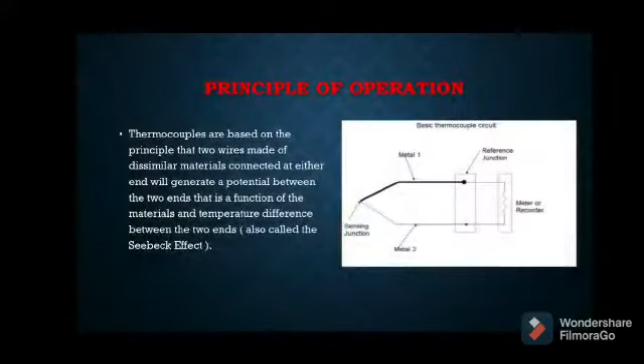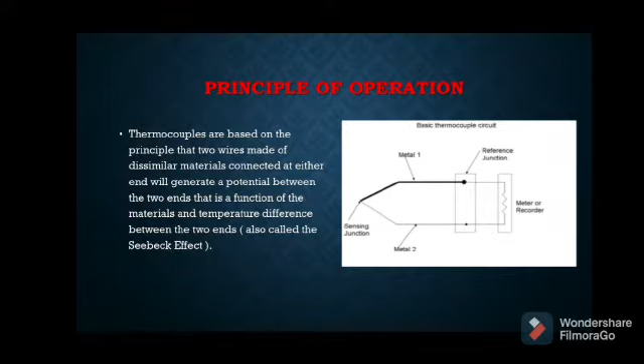Principle of operation: thermocouples are based on the principle that wires made of dissimilar materials connected at either end will generate a potential between the two ends that is a function of the material and temperature difference between the two ends, also called the Seebeck effect.

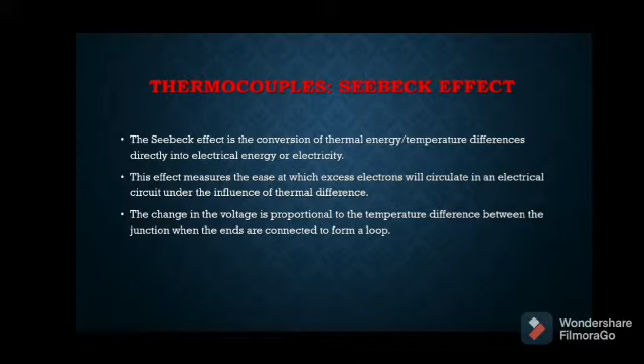Seebeck effect: the Seebeck effect is the conversion of thermal energy or temperature difference directly to electrical energy or electricity. The effect measures the ease at which the excess electrons will circulate in an electrical circuit under the influence of thermal difference. The change in the voltage is proportional to the temperature difference between the junctions when the ends are connected to form a loop.

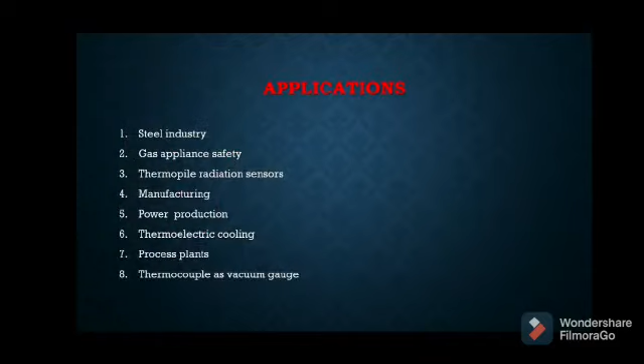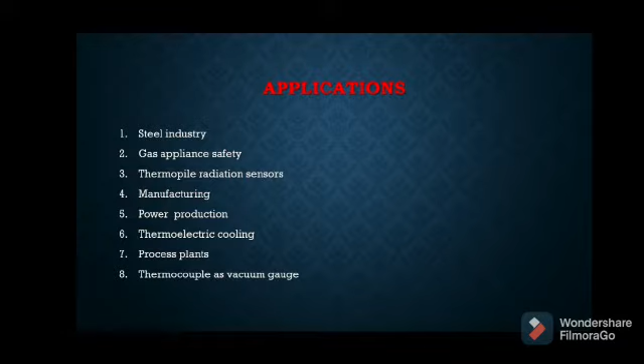Applications are steel industries, gas appliance safety, thermopile radiation sensor, manufacturing, power production, thermoelectric cooling, process plants, and thermocouple as vacuum gauge.

Advantages of thermocouple: it is rugged in construction, covers a wide temperature range, and using extension leads and compensating cables, long transmission distance for temperature measurement is possible. This is most suitable for temperature measurement of industrial furnaces, comparatively cheaper in cost. Calibration can be easily checked, offers good reproducibility, high speed of response, and satisfactory measurement accuracy.

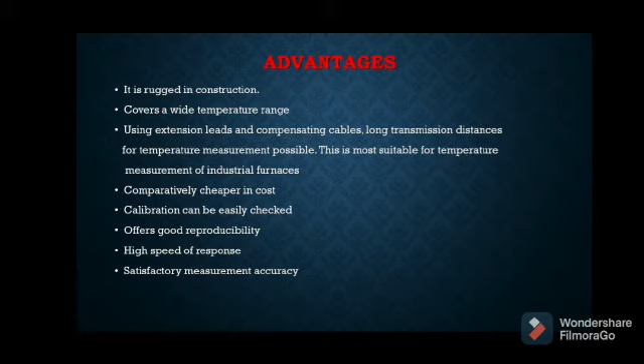Limitations: for accurate temperature measurement, cold junction compensation is necessary. The EMF induced versus temperature characteristic is somewhat nonlinear. Stray voltage pickup is possible. In many applications, amplification of signal is required.